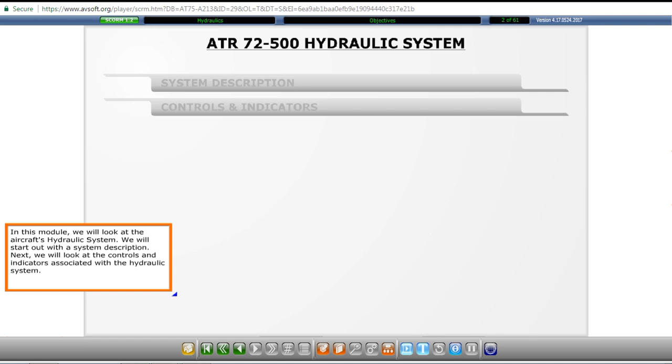In this module, we will look at the aircraft's hydraulic system. We will start out with a system description. Next, we will look at the controls and indicators associated with the hydraulic system.

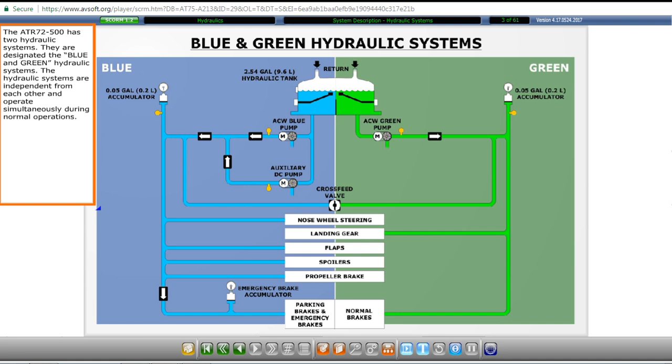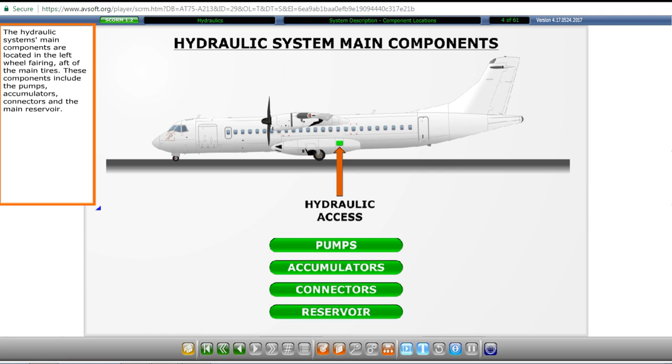The ATR 72-500 has two hydraulic systems. They are designated the blue and green hydraulic systems. The hydraulic systems are independent from each other and operate simultaneously during normal operations. The hydraulic system's main components are located in the left wheel fairing, aft of the main tires. These components include the pumps, accumulators, connectors, and the main reservoir.

Unlike other aircraft, the two hydraulic systems of the ATR 72-500 have a cross-feed valve that enables one system to pressurize the other system's components. Each hydraulic system is pressurized by an AC Wild powered electric hydraulic pump. Each pump delivers hydraulic pressure at 3,000 psi.

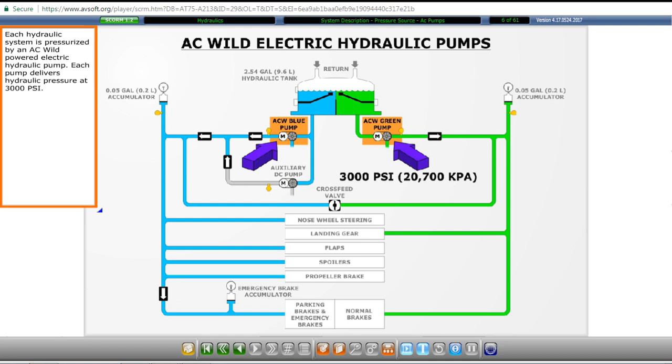The blue pump is powered by AC Wild Bus 1, and the green pump is powered by AC Wild Bus 2. The blue system has an additional DC-powered pump that can be used to pressurize the blue system components when the aircraft is on the ground with no power.

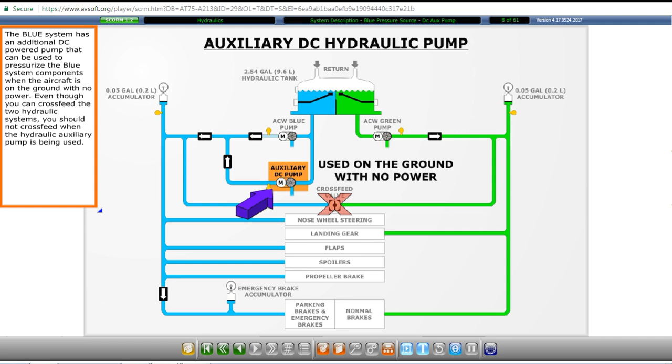Even though you can cross-feed the two hydraulic systems, you should not cross-feed when the hydraulic auxiliary pump is being used. Even though the auxiliary pump operates like the other pumps at 3,000 psi, it is a smaller pump and only produces about a third of the output.

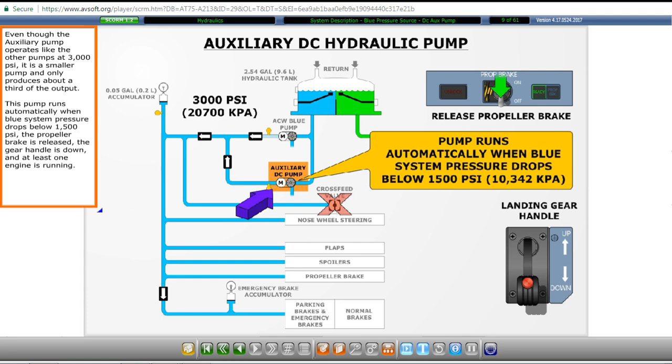This pump runs automatically when blue system pressure drops below 1,500 psi, the propeller brake is released, the gear handle is down, and at least one engine is running.

The blue hydraulic system supplies hydraulic pressure to the nose wheel steering system, the flaps, the spoilers, and the propeller brake. In addition, the blue system supplies the emergency and parking brake system.

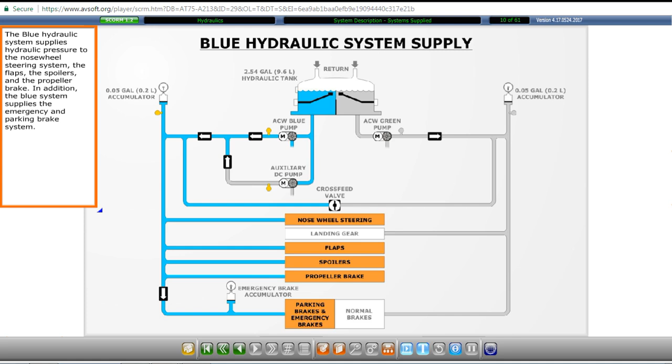The green hydraulic system supplies the landing gear system and the normal brakes.

The two hydraulic systems use a common hydraulic tank that is located in the hydraulic bay. This bay is in the left landing gear fairing. The tank is a direct air fluid contact tank that is not pressurized. A baffle prevents splashing of the fluid and limits foaming.

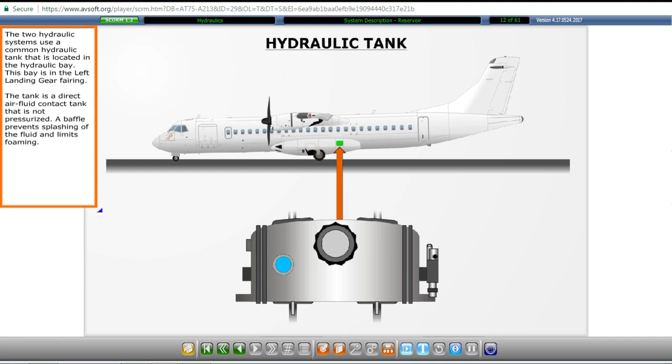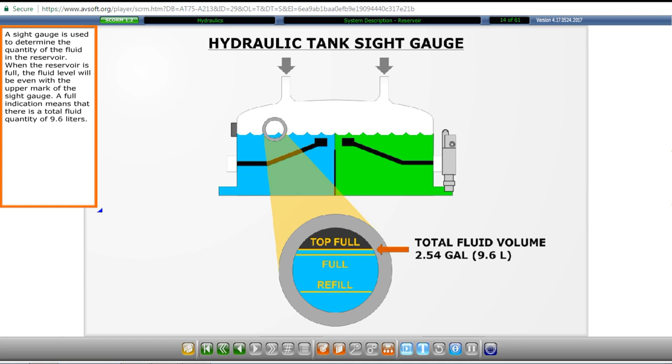The total capacity of the hydraulic reservoir is 9.6 liters. A sight gauge is used to determine the quantity of the fluid in the reservoir. When the reservoir is full, the fluid level will be even with the upper mark of the sight gauge. A full indication means that there is a total fluid quantity of 9.6 liters.

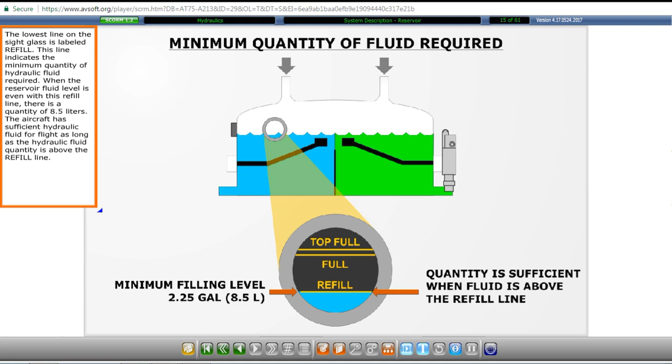The lowest line on the sight glass is labeled refill. This line indicates the minimum quantity of hydraulic fluid required. When the reservoir fluid level is even with this refill line, there is a quantity of 8.5 liters. The aircraft has sufficient hydraulic fluid for flight as long as the hydraulic fluid quantity is above the refill line.

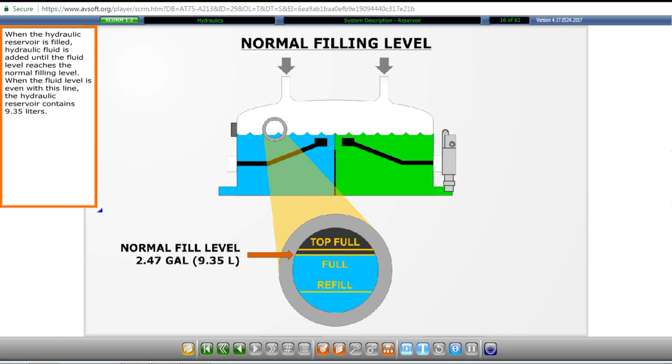When the hydraulic reservoir is filled, hydraulic fluid is added until the fluid reaches the normal filling level. When the fluid level is even with this line, the hydraulic reservoir contains 9.35 liters.

Hydraulic fluid is added to the tank through the filler cap. Skydrol is the most common brand of fluid used. Approved fluids are Skydrol LD4 and Hyjet 4.

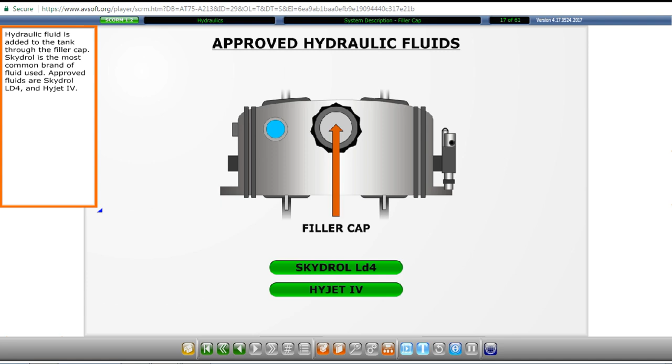The hydraulic tank is divided into two compartments that supply the blue and green hydraulic systems. Each compartment has a fluid capacity of 4 liters. The top of the tank divider is below the minimum filling level.

If a leak develops in one of the hydraulic systems, the fluid quantity in the reservoir will decrease below the level of the compartment divider. At that point, the fluid in the compartment that services the system with the leak will continue to decrease until there is no more fluid remaining in that compartment. The other compartment will continue to supply hydraulic fluid to the other hydraulic system.

Click on the tank to see the effect.

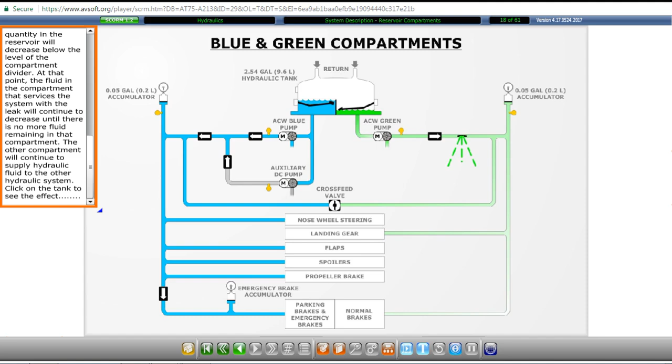Hydraulic fluid is added to the tank. The hydraulic tank is divided into two compartments.

The hydraulic fluid quantity in each reservoir compartment is monitored by an associated low-level light on the hydraulic power panel located on the flight deck overhead panel. When the level in a compartment decreases below 2.5 liters, the associated low-level light illuminates amber on the hydraulic power panel.

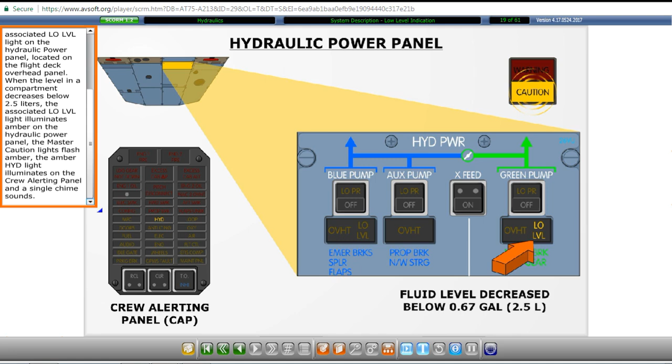The master caution lights flash amber. The amber hydraulic light illuminates on the crew alerting panel, and a single chime sounds.

Two drain ports located on the bottom of the tank are used to drain fluid from the hydraulic reservoir. Two clogging indicators monitor the blue and green filters in order to identify the presence of particles that have entered the system. These particles could potentially cause clogging.

The indicators look like turkey poppers and are visual indicators only. There are no cockpit warnings. They are located on the aft side of the reservoir.

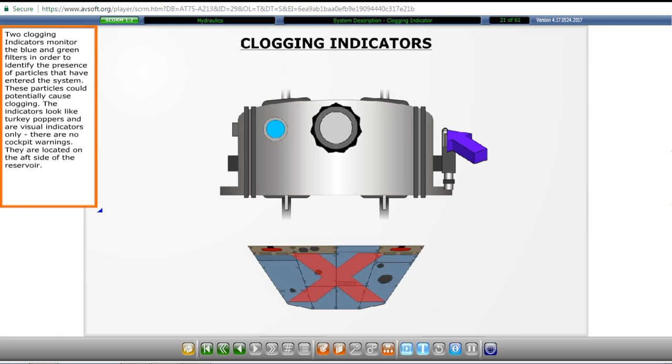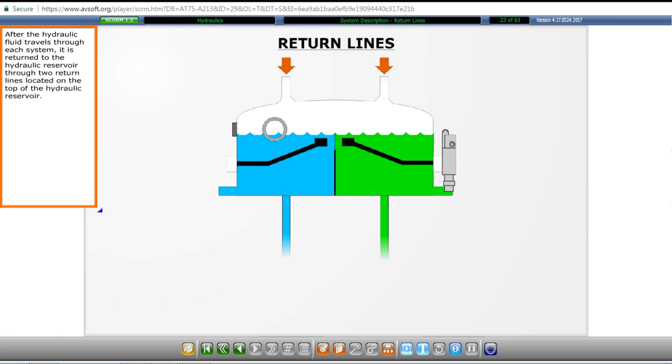An overflow port relieves any excess fluid from the tank. This excess fluid may be due to overfilling or thermal expansion. After the hydraulic fluid travels through each system, it is returned to the hydraulic reservoir through two return lines located on the top of the hydraulic reservoir.

We will now look at the green hydraulic system. The green hydraulic system is pressurized by an AC-powered main hydraulic pump.

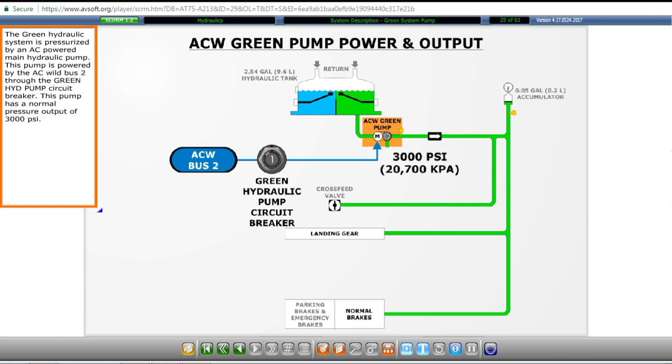This pump is powered by the AC Wild Bus 2 through the green hydraulic pump circuit breaker. This pump has a normal pressure output of 3,000 psi. The output of the green hydraulic pump is monitored by a pressure sensor downstream of the pump output.

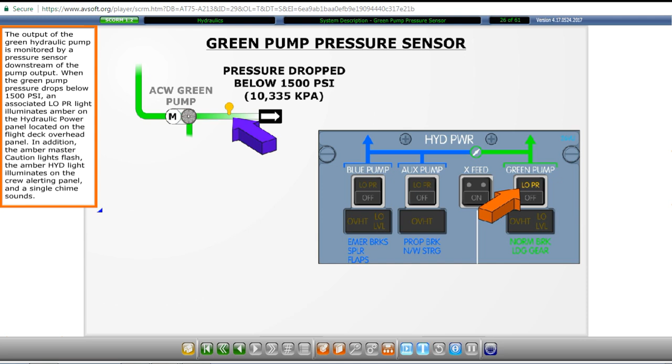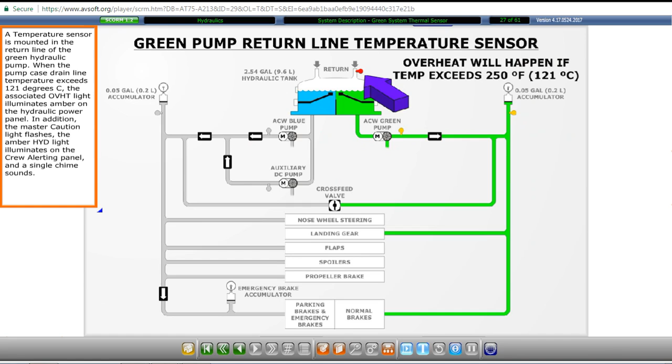When the green pump pressure drops below 1500 psi, an associated low pressure light illuminates amber on the hydraulic power panel located on the flight deck overhead panel. In addition, the amber master caution lights flash, the amber hydraulic light illuminates on the crew alerting panel, and a single chime sounds.

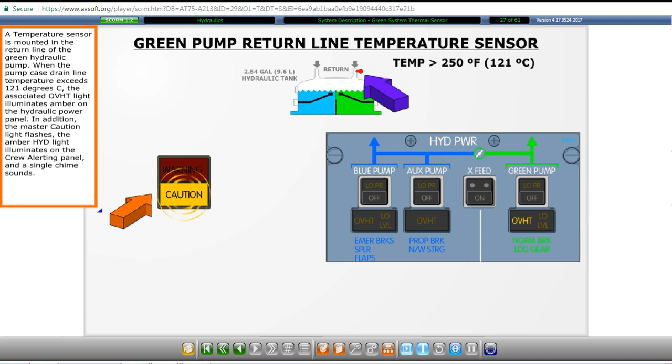A temperature sensor is mounted in the return line of the green hydraulic pump. When the pump case drain line temperature exceeds 121 degrees Celsius, the associated overheat light illuminates amber on the hydraulic power panel. In addition, the master caution light flashes, the amber hydraulic light illuminates on the crew alerting panel, and a single chime sounds. This indication may signify that bearing failure is impending for that pump.

The corrective action for a blue or green system overheat light is to switch the associated pump off and then select cross-feed valve on. Once the system is cooled back down, reselecting the pump back on is permissible.

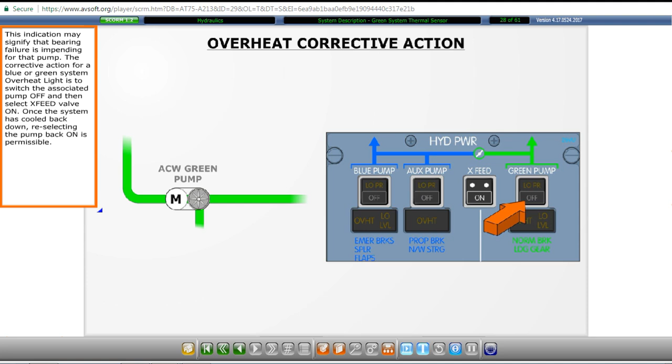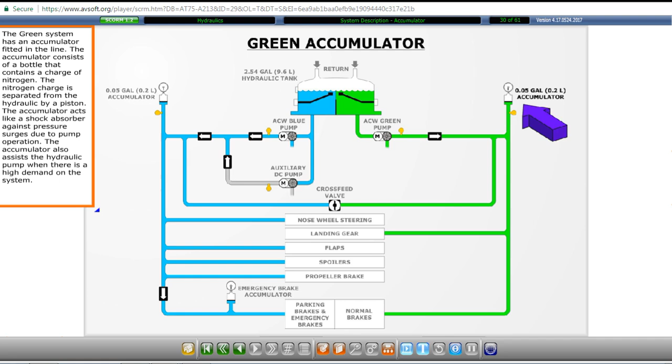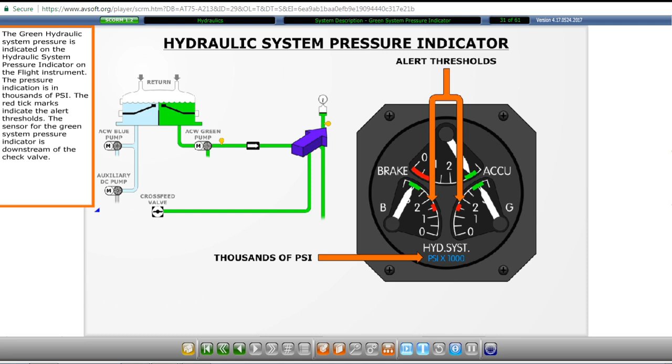The green hydraulic system pressure is indicated on the hydraulic system pressure indicator on the flight instrument panel. The pressure indication is in thousands of psi. The red tick marks indicate the alert thresholds. The sensor for the green system pressure indicator is downstream of the check valve.

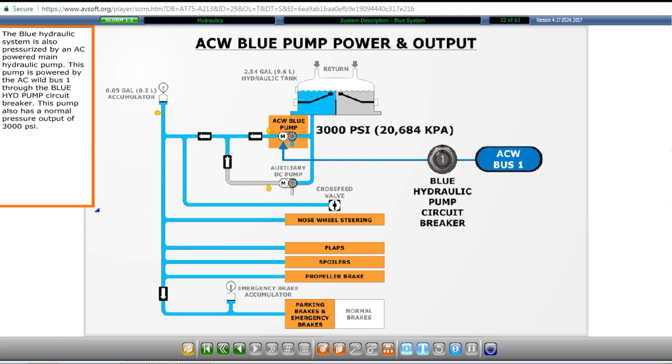The blue hydraulic system is also pressurized by an AC-powered main hydraulic pump. This pump is powered by the AC Wild Bus 1 through the blue hydraulic pump circuit breaker. This pump also has a normal pressure output of 3,000 psi. The output of the blue hydraulic pump is monitored by a pressure sensor downstream of the pump output.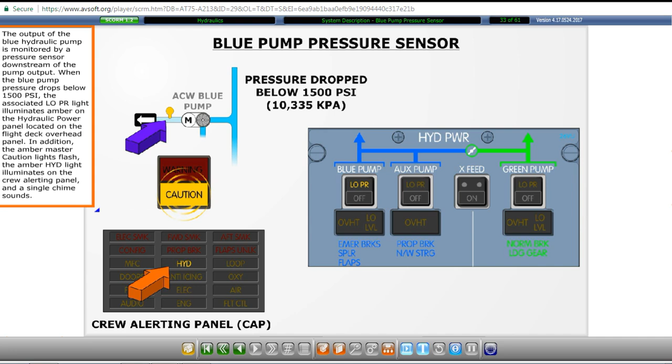When the blue pump pressure drops below 1500 psi, the associated low pressure light illuminates amber on the hydraulic power panel located on the flight deck overhead panel. In addition, the amber master caution lights flash, the amber hydraulic light illuminates on the crew alerting panel, and a single chime sounds. The corrective action for a low pressure light is to switch off the associated pump and then select the crossfeed valve to on.

A temperature sensor is mounted in the return line of the blue hydraulic pump. When the pump case drain line temperature exceeds 121 degrees Celsius, the associated overheat light illuminates amber on the hydraulic power panel. In addition, the master caution lights flash, the amber hydraulic light illuminates on the crew alerting panel, and a single chime sounds. The blue system incorporates the auxiliary pump.

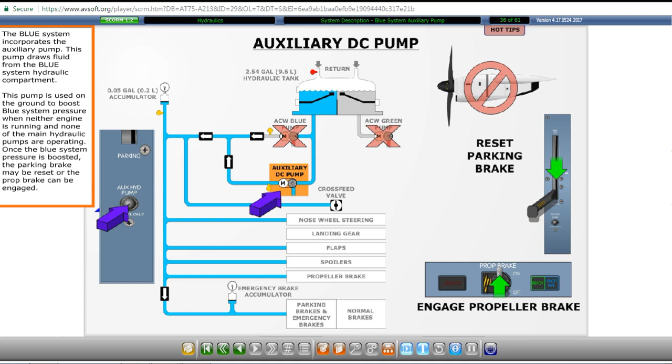This pump draws fluid from the Blue System hydraulic compartment. This pump is used on the ground to boost Blue System pressure when neither engine is running and none of the main hydraulic pumps are operating. Once the Blue System pressure is boosted, the parking brake may be reset or the prop brake can be engaged.

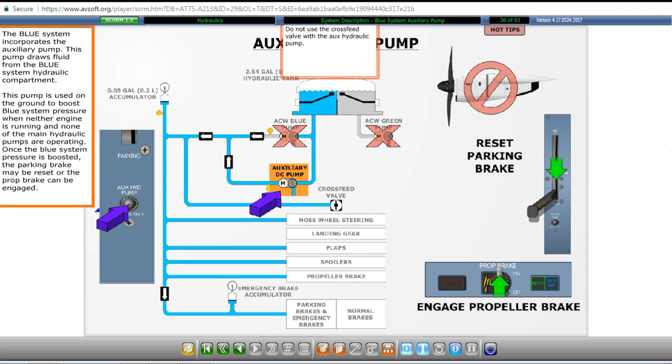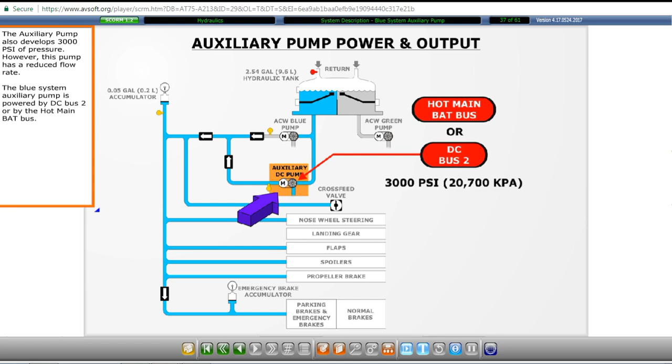The auxiliary pump also develops 3000 psi of pressure. However, this pump has a reduced flow rate. The Blue System auxiliary pump is powered by DC bus 2 or by the hot main battery bus.

Normally, DC bus 2 is the power source for the auxiliary pump. If DC bus 2 is not powered, the auxiliary pump is powered by the hot main battery bus if the auxiliary pump push button is depressed. The auxiliary push button is located on the forward, left-hand side of the center pedestal. Once depressed, the auxiliary hydraulic pump will run for 30 seconds.

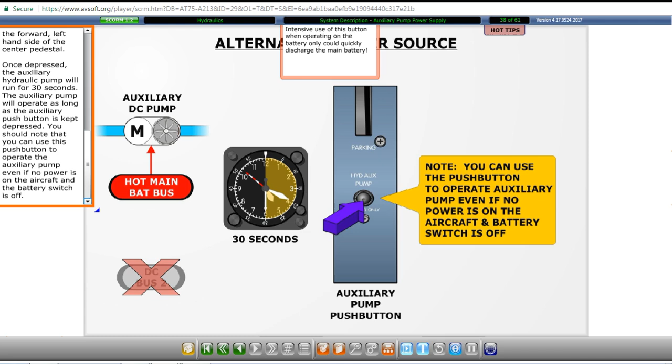The auxiliary pump will operate as long as the auxiliary push button is kept depressed. You should note that you can use this push button to operate the auxiliary pump even if no power is on the aircraft and the battery switch is off.

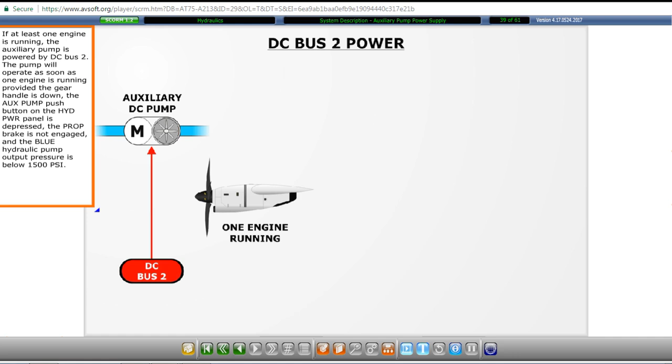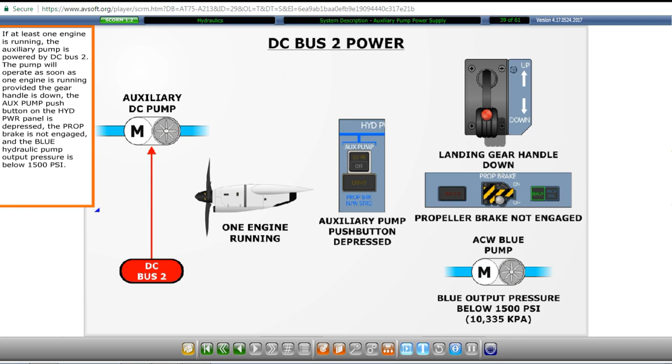If at least one engine is running, the auxiliary pump is powered by DC bus 2. The pump will operate as soon as one engine is running, provided the gear handle is down, the auxiliary pump push button on the hydraulic power panel is depressed, the prop brake is not engaged, and the blue hydraulic pump output pressure is below 1500 psi.

The auxiliary pump will cease to operate if any of the enabling conditions is removed. If the prop brake is engaged when the auxiliary pump is operating, the auxiliary pump will continue running for 15 seconds after the prop brake is engaged.

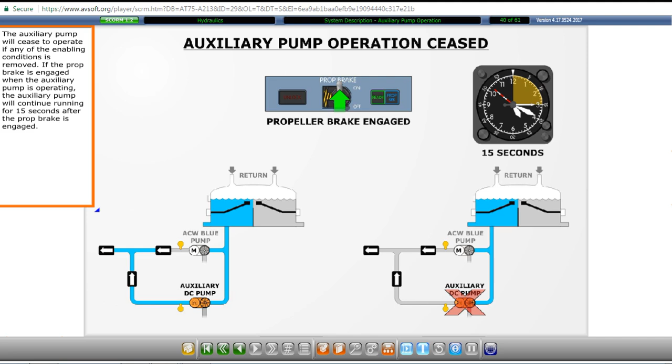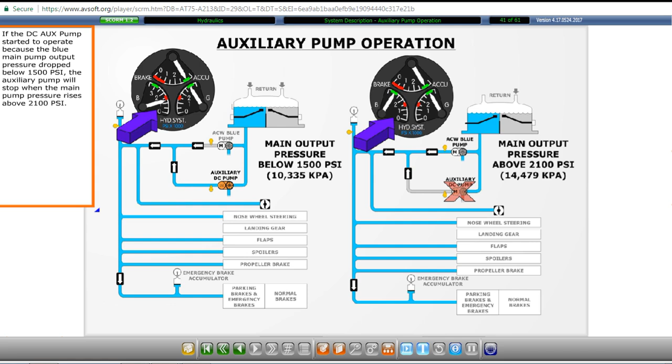If the DC auxiliary pump started to operate because the blue main pump output pressure dropped below 1500 psi, the auxiliary pump will stop when the main pump pressure rises above 2100 psi. The output of the blue auxiliary hydraulic pump is monitored by a pressure sensor downstream of the pump output.

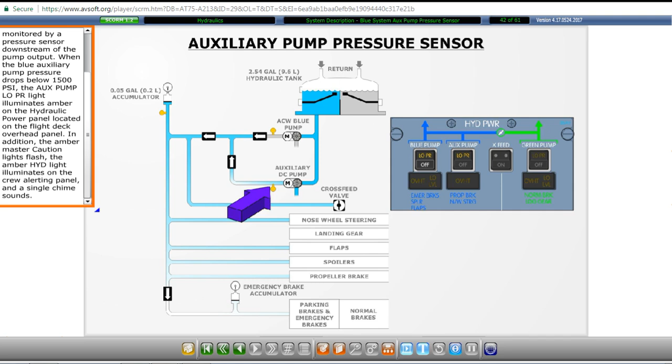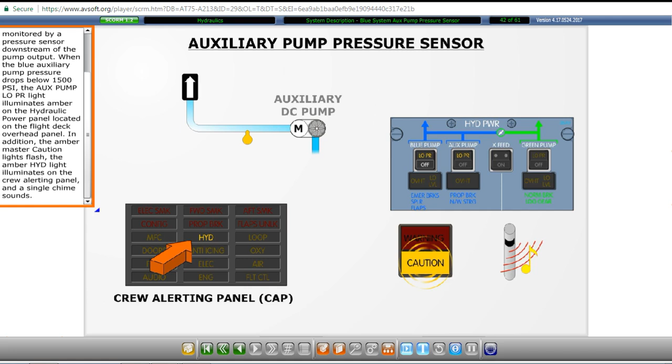When the blue auxiliary pump pressure drops below 1500 psi, the auxiliary pump low pressure light illuminates amber on the hydraulic power panel located on the flight deck overhead panel. In addition, the amber master caution lights flash, the amber hydraulic light illuminates on the crew alerting panel, and a single chime sounds.

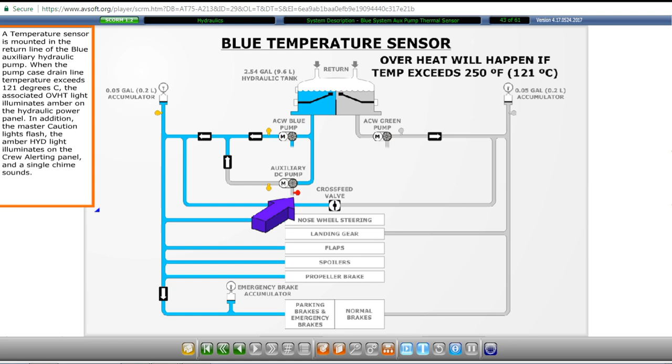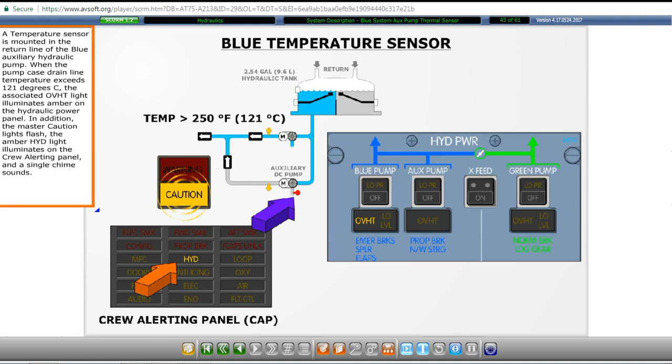A temperature sensor is mounted in the return line of the blue auxiliary hydraulic pump. When the pump case drain line temperature exceeds 121 degrees Celsius, the associated overheat light illuminates amber on the hydraulic power panel. In addition, the master caution lights flash, the amber hydraulic light illuminates on the crew alerting panel, and a single chime sounds.

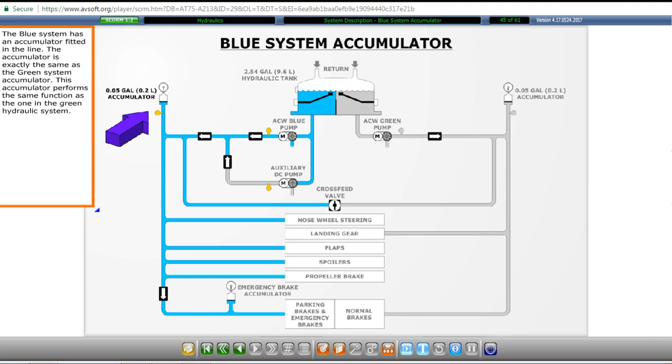The auxiliary pump supplies hydraulic pressure to the same line that is supplied by the blue hydraulic pump. One-way check valves prevent the backflow of hydraulic fluid into either pump. The blue system has an accumulator fitted in the line. The accumulator is exactly the same as the green system accumulator. This accumulator performs the same function as the one in the green hydraulic system.

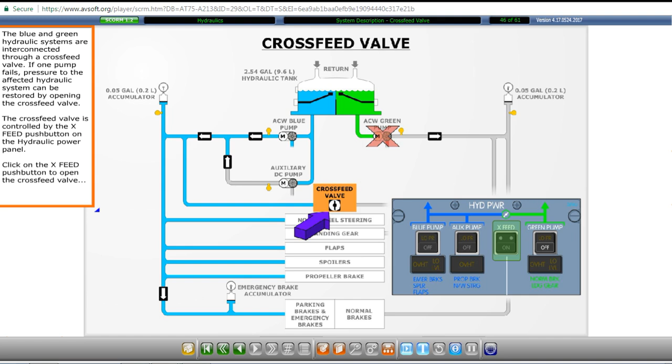The blue and green hydraulic systems are interconnected through a crossfeed valve. If one pump fails, pressure to the affected hydraulic system can be restored by opening the crossfeed valve. The crossfeed valve is controlled by the crossfeed push button on the hydraulic power panel. Click on the crossfeed push button to open the crossfeed valve.

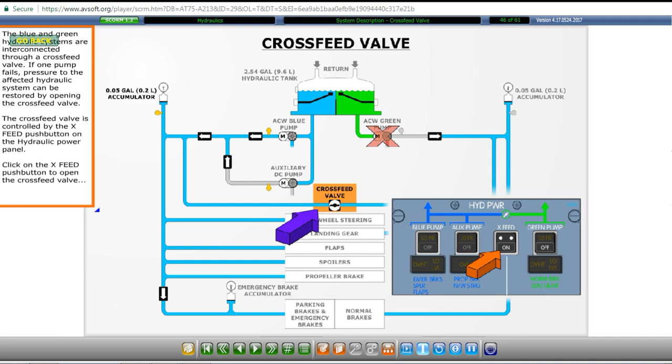Once the crossfeed valve is opened, it will automatically close if the fluid quantity in either hydraulic reservoir compartment drops below 2.5 liters. This will prohibit adding fluid to a system that could possibly be losing fluid and prevents the other system from losing fluid and entering a low-level condition.

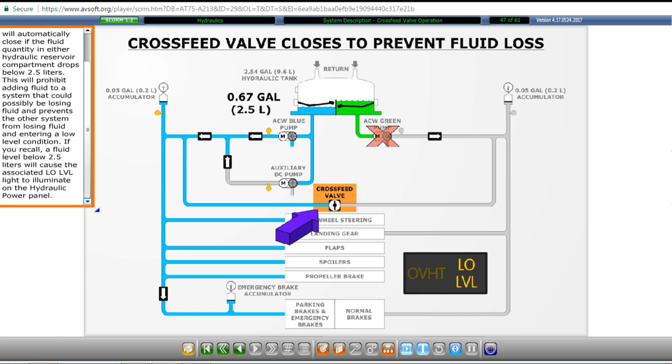If you recall, a fluid level below 2.5 liters will cause the associated low-level light to illuminate on the hydraulic power panel. If either low-level light is illuminated, the crossfeed push button is inhibited and you will not be able to open the hydraulic crossfeed valve.

There are no indications on the push button of the status of the crossfeed valve. The ON caption in the push button indicates that the crossfeed valve has been commanded to the open position. The only way to verify the operation of the crossfeed valve is to observe the indications on the hydraulic pressure indicator.

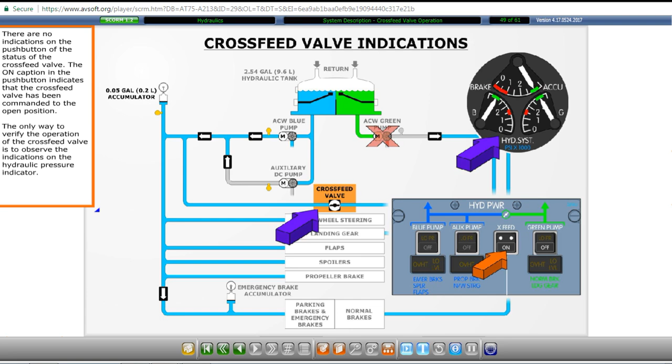The crossfeed valve is electrically controlled. It is powered by the DC standby bus. The crossfeed valve will automatically close if power is removed from the valve.

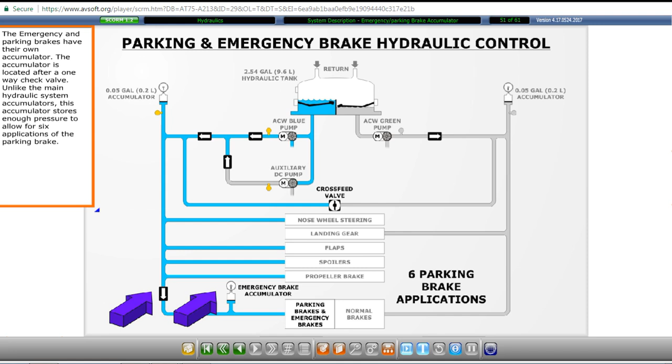The emergency and parking brakes have their own accumulator. The accumulator is located after a one-way check valve. Unlike the main hydraulic system accumulators, this accumulator stores enough pressure to allow for 6 applications of the parking brake.

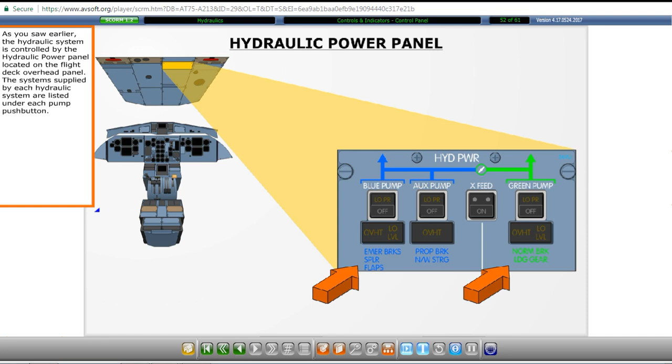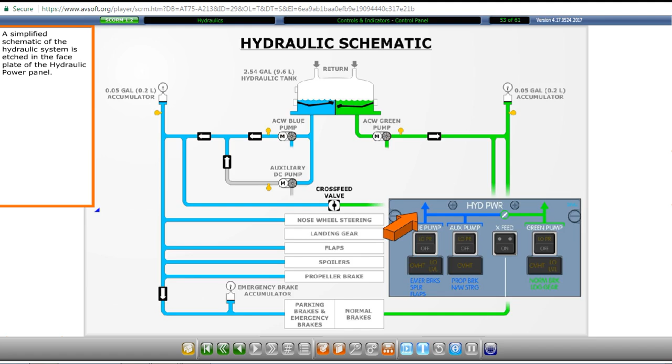As you saw earlier, the hydraulic system is controlled by the hydraulic power panel located on the flight deck overhead panel. The systems supplied by each hydraulic system are listed under each pump push button. A simplified schematic of the hydraulic system is etched in the faceplate of the hydraulic power panel. The main hydraulic pumps are controlled by the associated pump push buttons.

The push button and alert lights of the blue system push button are powered by the DC emergency bus. The push button of the green system is powered by the DC essential bus. The alert lights of the green system push button are powered by the DC emergency bus.

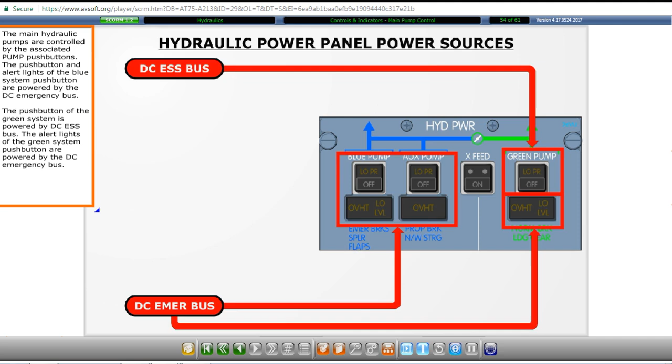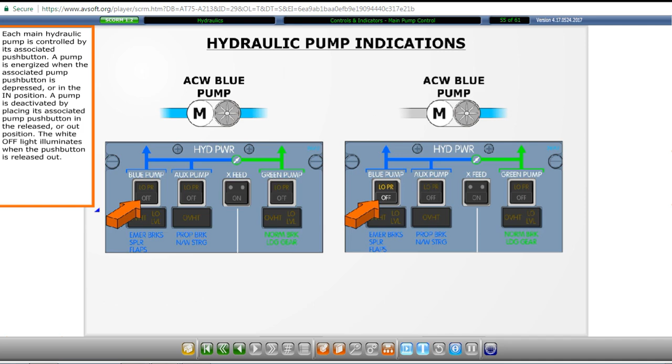Each main hydraulic pump is controlled by its associated push button. A pump is energized when the associated pump push button is depressed or in the in position. A pump is deactivated by placing its associated pump push button in the released or out position. The white off light illuminates when the push button is released out.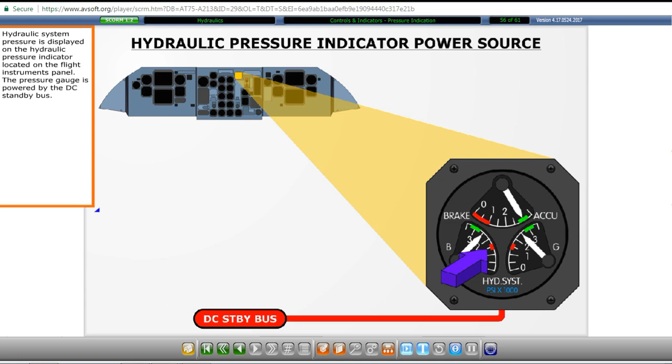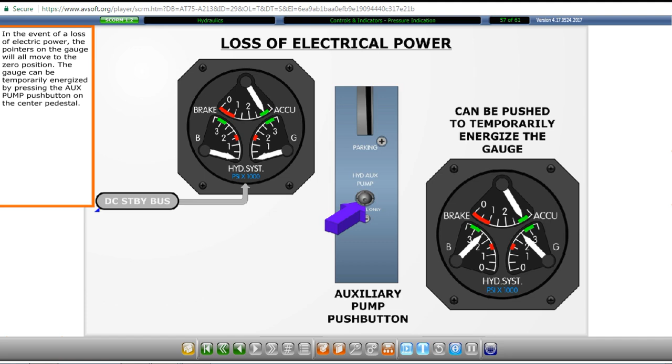Hydraulic system pressure is displayed on the hydraulic pressure indicator located on the flight instruments panel. The pressure gauge is powered by the DC standby bus. In the event of a loss of electric power, the pointers on the gauge will all move to the 0 position. The gauge can be temporarily energized by pressing the auxiliary pump push button on the center pedestal.

This gauge indicates the system pressure in the associated hydraulic system after the check valve. The 2 lower indicators on the left and right of the triplex gauge show blue and green system pressures respectively. The upper indicator of the gauge shows pressure in the emergency and parking brake accumulator.

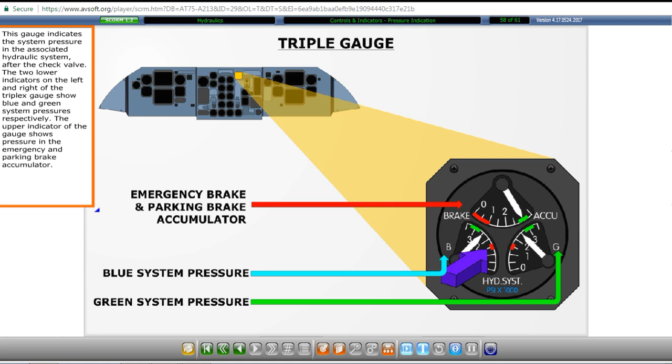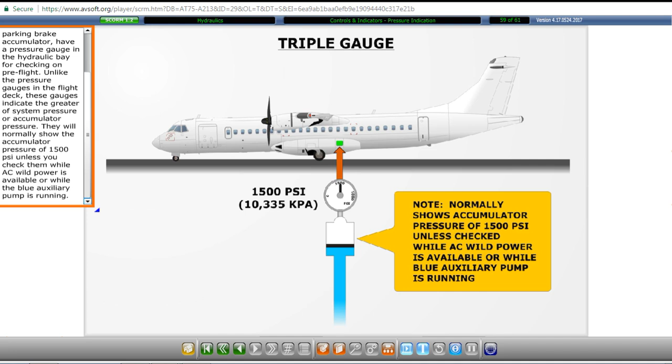Each accumulator, including the emergency and parking brake accumulator, has a pressure gauge in the hydraulic bay for checking on pre-flight. Unlike the pressure gauges in the flight deck, these gauges indicate the greater of system pressure or accumulator pressure. They will normally show the accumulator pressure of 1500 psi unless you check them while AC wild power is available or while the blue auxiliary pump is running.

If brake accumulator pressure is insufficient, the auxiliary pump push button can be used to boost blue system hydraulic pressure and restore the brake accumulator to 3000 psi. This concludes the hydraulic system module.